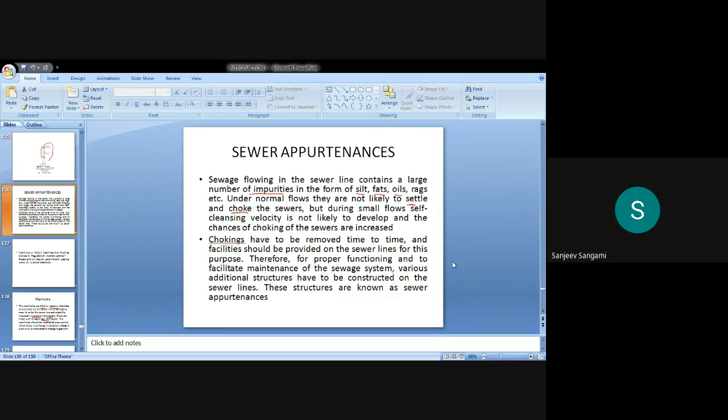In the previous class, we were discussing the sewer appurtenances. These sewer appurtenances are very important from the examination point of view. When it comes to the sewer appurtenances, of course, these are the parts of the sewer network. In other words, they are the parts of the sewer lines.

They are used in most of the municipal corporations and district headquarters, and very less used in village networks. They are not that important in the villages, because in the village the flow is very less and most of the villages are built with decentralized systems.

A decentralized system means each of the houses has its own type of disposal system, like a septic tank and soak pit. You might all know this. So normally they discharge their waste either in septic tanks or small community-based systems that treat the wastewater. So there, very less importance has to be given to the sewer appurtenances.

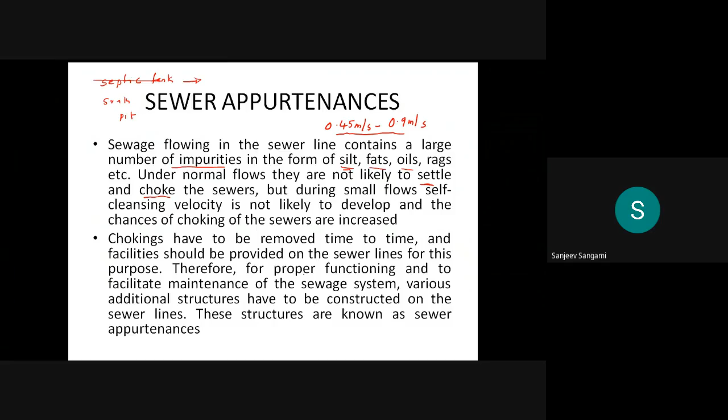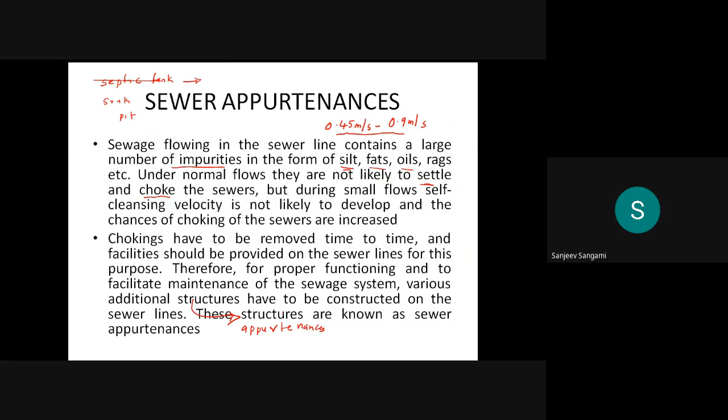Therefore, for proper functioning and to facilitate the maintenance of the sewage system, various additional structures are needed. Additional structures means appurtenances. For the smooth movement of the sewage in the sewer, some additional structures, which we call appurtenances, have to be constructed on the sewer lines. These structures are known as sewer appurtenances. We'll see which ones are important in our sewer appurtenances.

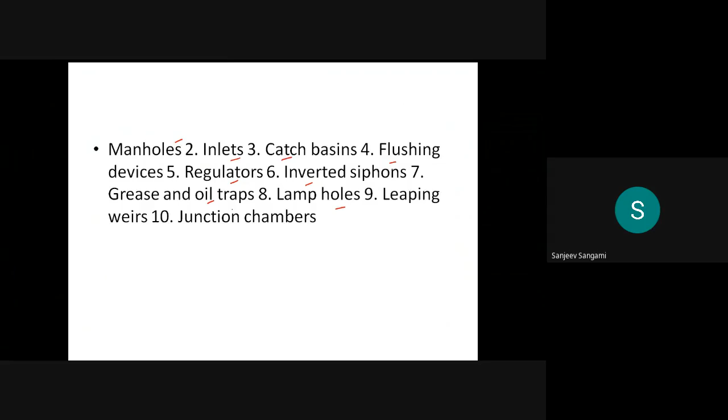The first one is the manhole. The second one is inlets. The third one is catch basins. The fourth one is flushing devices. The fifth one is regulators. The sixth one is inverted siphons. And the seventh one is oil and grease traps, lamp holes, leaping weirs, and junction chambers. We'll study all these one by one in detail in the further slides.

Manholes are RCC or masonry chambers constructed on the sewer line to allow a man to enter the sewer line and make the necessary inspection and repairs. They serve two purposes: first, inspection, and second, repairs. If you construct sewer lines without manholes, it is nearly impossible to inspect and repair wherever a breakage has happened.

These are fitted with suitable cast iron covers so that the manhole is protected from whatever load is transferred onto it. The manholes should be installed at every point where there is a change in direction. This is very important.

Then what exactly is the location of these manholes? First one, wherever there are changes in direction, for example junctions, it is highly required, because there the road direction is going to change, as well as whatever sewer networks are going to join at that point. And it has to be made at a change in the pipe size, the second location.

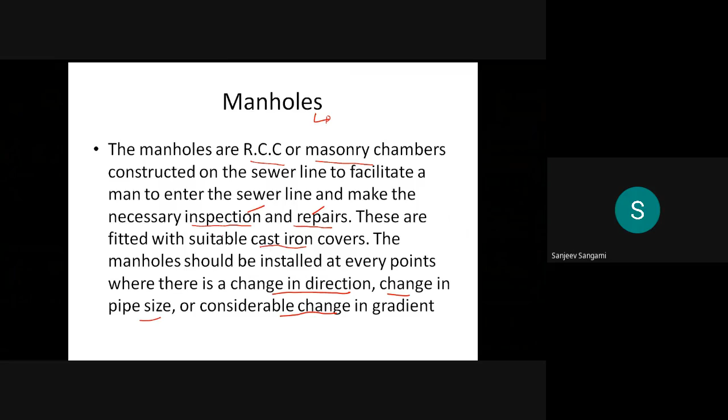So of course, IS codes are already available. If you refer to the IS codes for the construction of manholes for the sewer network, they have already mentioned that an interval ranging from 30 meters to 60 meters can be provided.

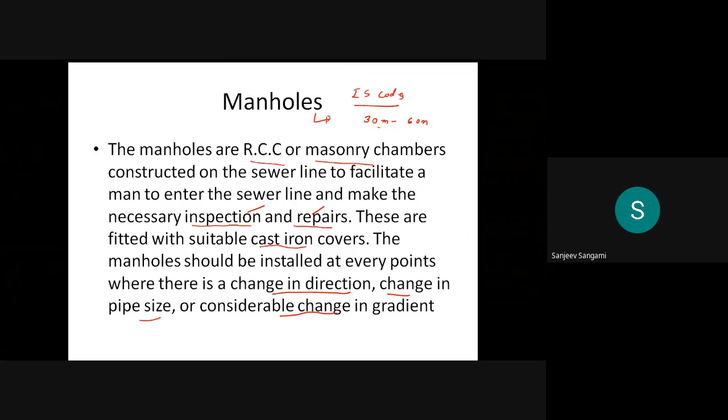So this is the construction of the manhole cover. In this, you can see that this one is the working chamber, these are the steps, and this is the shaft. This one is the offset. At the bottom portion it is a little bit wider compared to the top one, and this is the main sewer. If any branch sewer is there, it has to be connected to the main sewer. They have made benching, and this is made up of RCC. This you have already seen.

Then why are the steps provided? For the inspection purpose. Suppose you want to repair it, the person will come, inspect it, and if any leakages are there, he will repair it and provide suitable suggestions on what can be done. Of course, this is the section view. If you see this, it looks like this.

So whatever the ground level is, just 15 to 20 inches below it they are going to provide the manhole cover, which is made up of steel, so that if any load is transferred, it should not be transferred to the manhole, and it has to be transferred to the ground level itself. That is how it has to be designed.

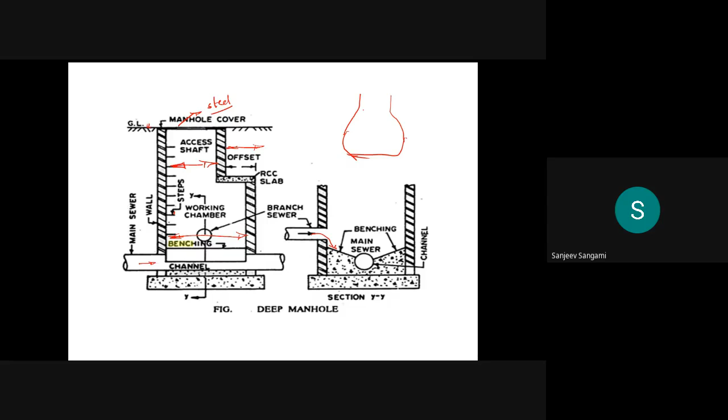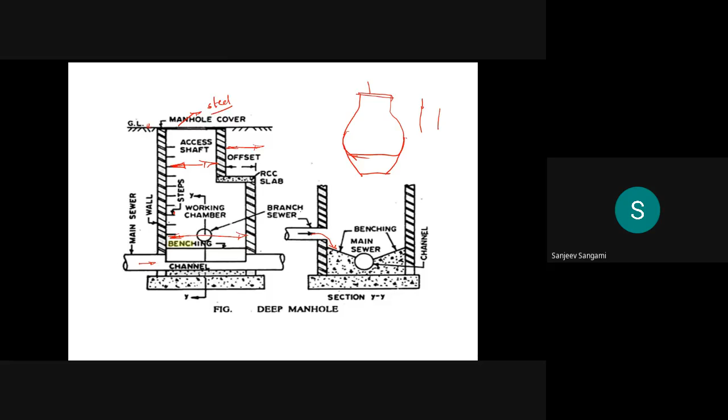And almost always the size will be of this shape normally. If you see the manholes, it will be of this shape only. Slightly it will be like that; it's not exactly like this. Slightly it is like this, so that whatever load is there, it is transferred in this direction. Suppose you construct it this way, then the load is directly going to transfer. To avoid that, we'll see how exactly the construction happens in the next slides.